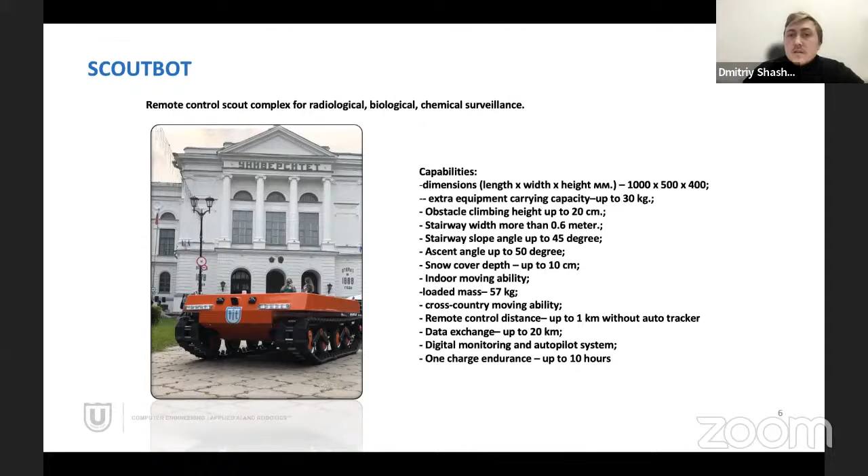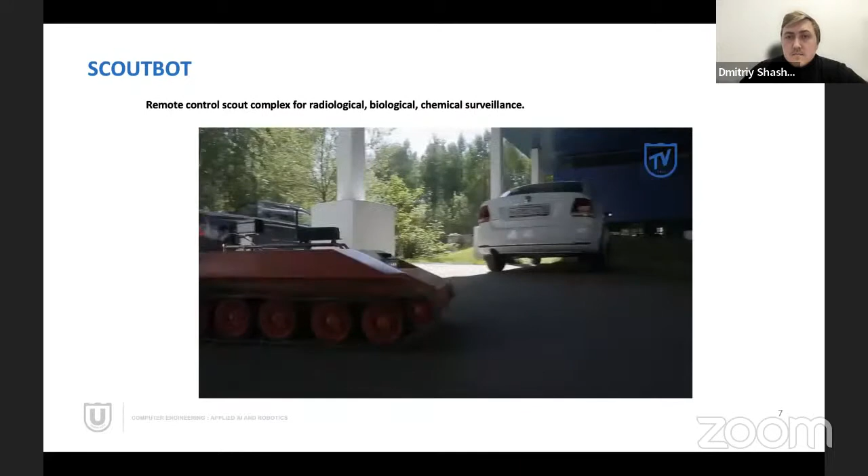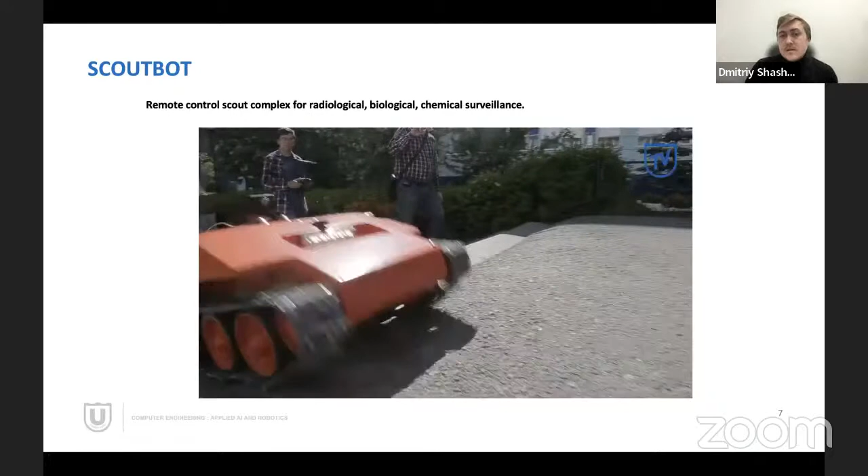Let me tell a few words about our projects. One of them is ScoutBot. This is a remote control scout complex for radiological, biological, and chemical surveillance. And this is a video of how it works in real life. This type of robot was made by the staff of our laboratory, and it can be controlled remotely and also autonomously.

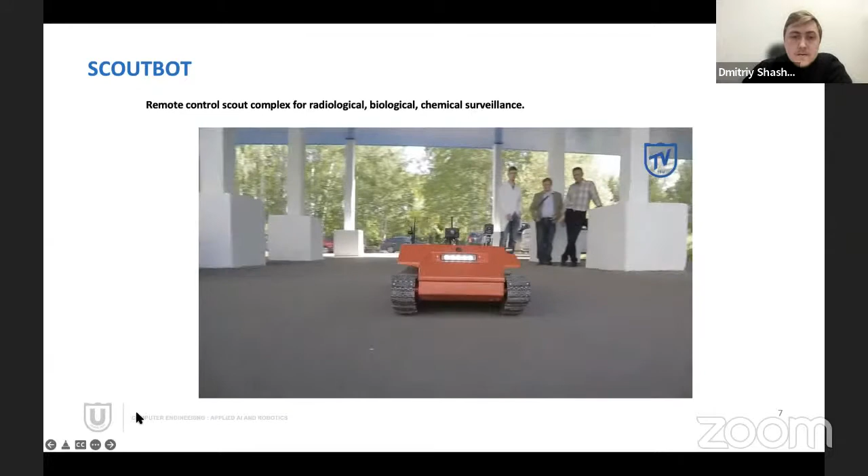If you are interested in such types of robotics, you're welcome to join us. Another big field of our research is UAV and different subtopics of the UAV field. We focus on autonomous control systems, and we also work on SLAM navigation. Maybe some of you are familiar with such algorithms. It is one of the modern approaches in the navigation of any robot, simultaneous localization and mapping.

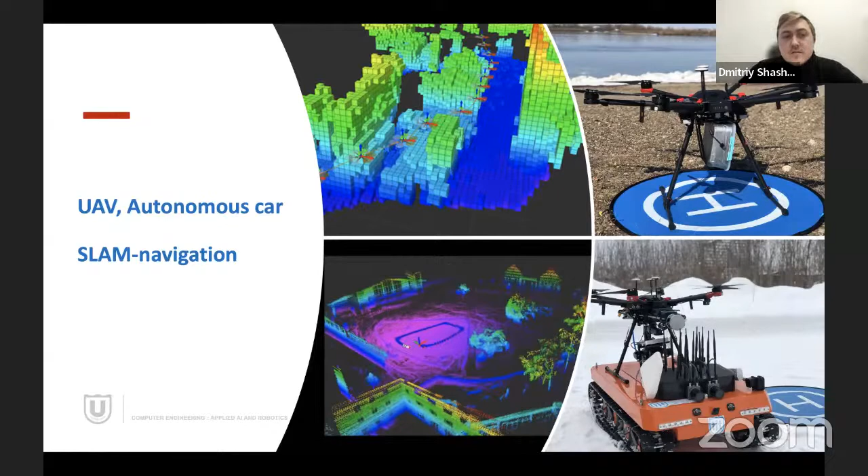This is also one of our projects, named Drone Hunter. It was a project about developing an autonomous control system for UAV, a highly intelligent control system. The idea was to track and recognize other drones on board without using any ground stations, cloud systems, servers and so on.

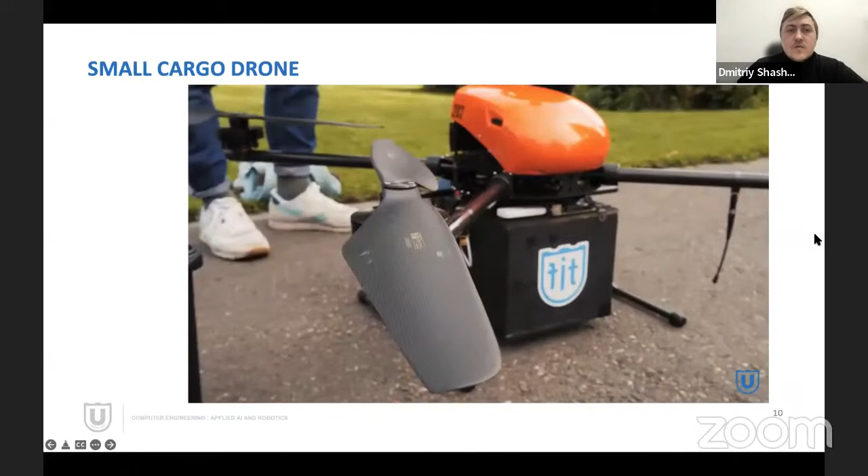One of our projects is with our industrial partner, one of the biggest in the field of UAV in Russia, the company named Geoscan, and we work in the field of small cargo delivery with this company.

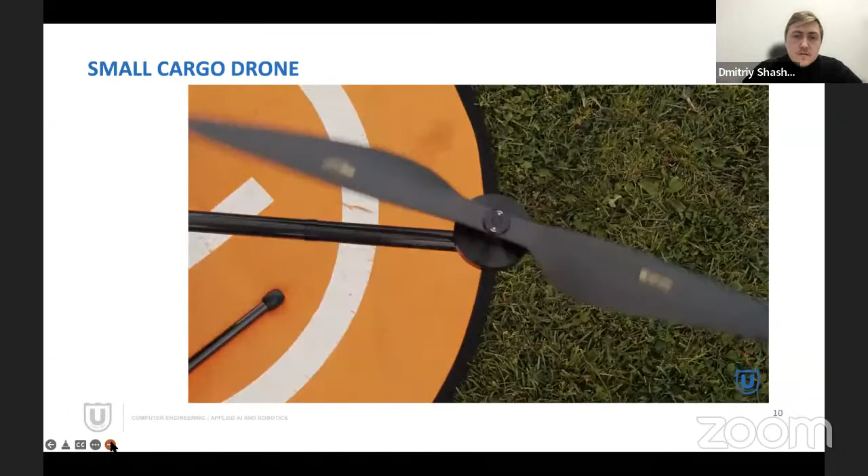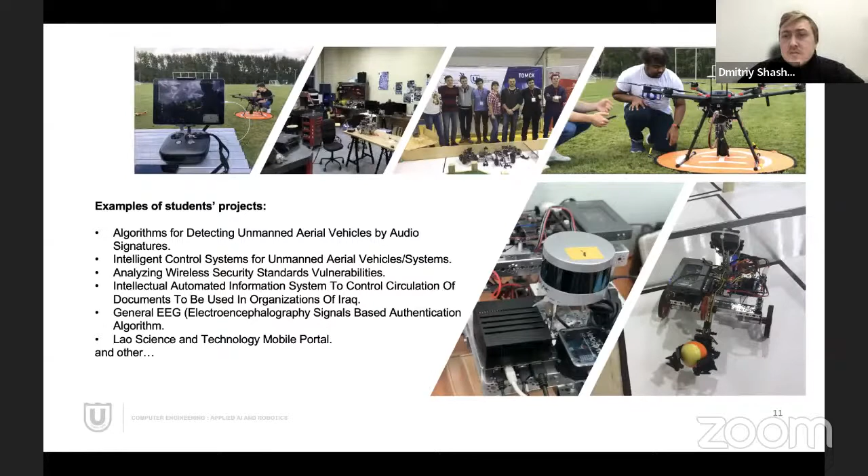Okay, let's move on. Here you can see examples of students' projects which have already been done: algorithms for detecting UAV by audio signatures, intelligent control systems, analyzing wireless security standards, intellectual automated information systems, and so on. Okay, that's it from me.

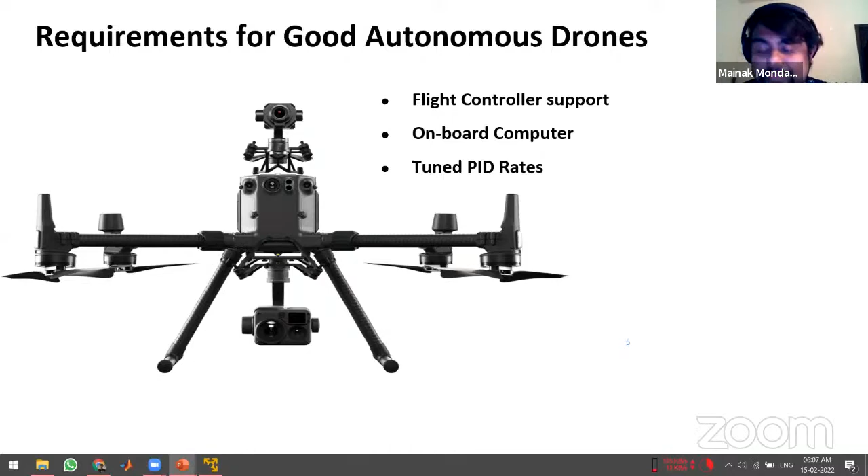So I'm not going to be going into them. There are various guides online. But again, if you want any help on them, you can of course reach out to me. Yep. So tuned PIDs are a must. Okay. Let me get into the introduction a bit more.

Let me tell you what a flight controller is first. A flight controller, or FC, is a small circuit board of varying complexity. Its function is to direct the RPM of each motor in response to the input. Just a second, we have another guy. A command from the pilot for the multirotor to move is fed into the flight controller, which determines how to manipulate the motors accordingly. And once you manipulate the motors, you can generate thrust and move accordingly. Okay.

Then, of course, the major components inside the flight controller are the onboard sensors. There's usually a gyroscope, accelerometer, barometer, etc., so that it can accurately recognize the state of the drone and make adjustments to stabilize the drone or move it according to the user input. There has to be a sensor interface connection, something like UART, I2C, PWM, serial, SPI, etc. You need to connect your flight controller to the motors and to different external sensors if required, like a GPS or maybe an external IMU.

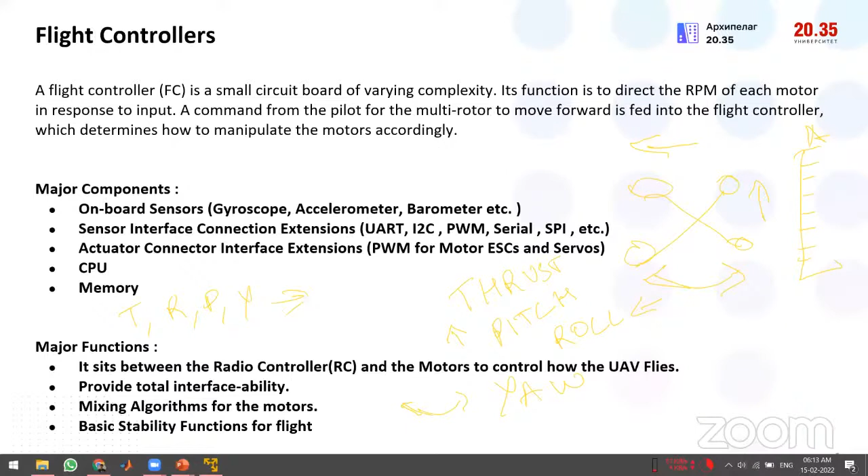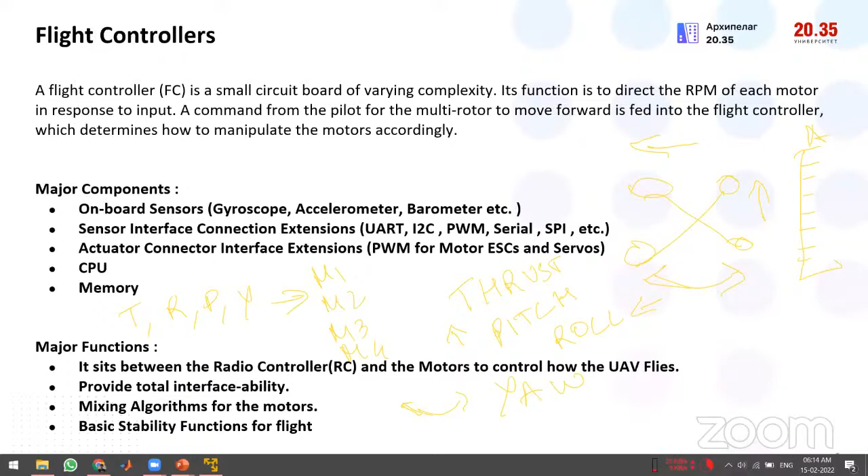And this, of course, is controlled by the flight controller. What the flight controller does is it takes in commands of thrust, roll, pitch, and yaw, and gives output for 4 motors. So for example, we have a quadcopter, so it will give you outputs for M1, M2, M3, and M4. It needs to distribute the thrust, the roll, the pitch and the amount of yaw for each motor.

Let me just clear out the screen. I hope you could see the drawing I was making. Yep. Let me just remove this. Just a second.

Okay. So there are several flight controllers supported. Most flight controllers are divided into F1, F3, F4, F7, and H7 flight controllers. These are basically the processor chips inside the microcontroller unit. The processor is the brain of the flight controller, similar to the CPU in a computer.

There are currently 10 series of STM32 microcontroller units. From faster to slower processing speed, there are H7, F7, F4, F3, F2, F1. So the slowest one is F1 and the fastest one is H7. As you can see, the processing speed varies from level to level.

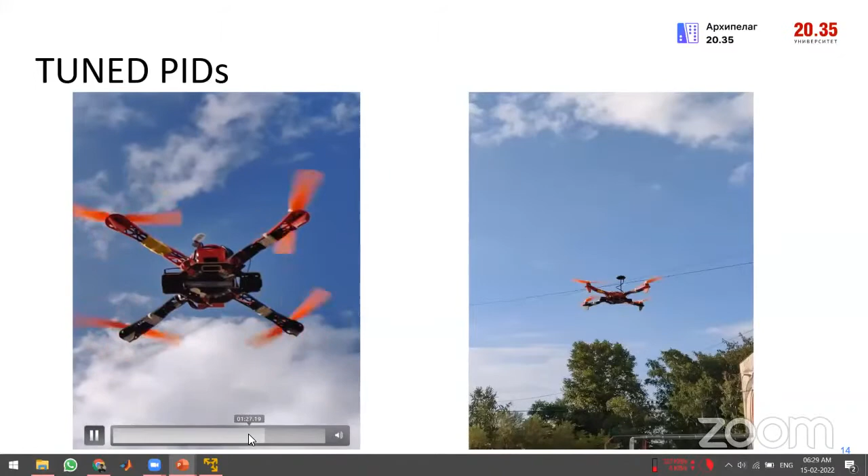Let me just move it forward. I go below it as well. And you can see the drone is as stable as it gets. Okay. And this is another example where I'm moving the drone. And at the moment I left the sticks, and you can still see the drone moving really well.

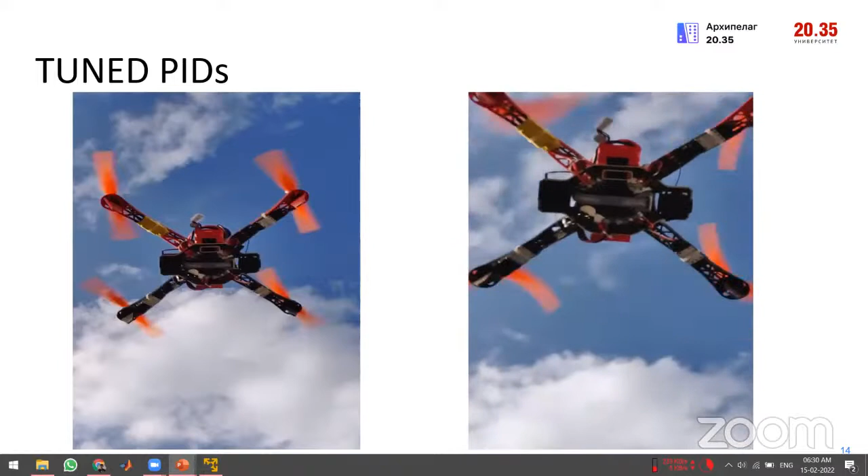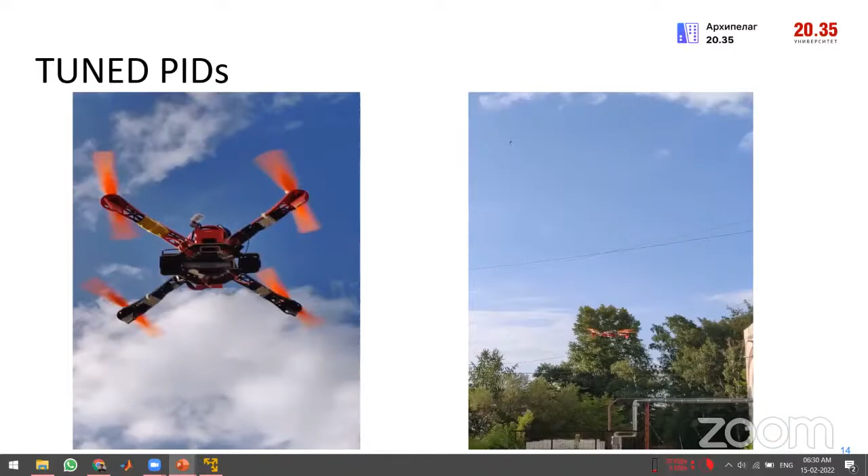So if you're going to build your own drone, I suggest reading about PIDs, and of course tuning your drone. I'm not going to go into what the PID system is. Anyway, let me tell you where smart control can be applied in drones.

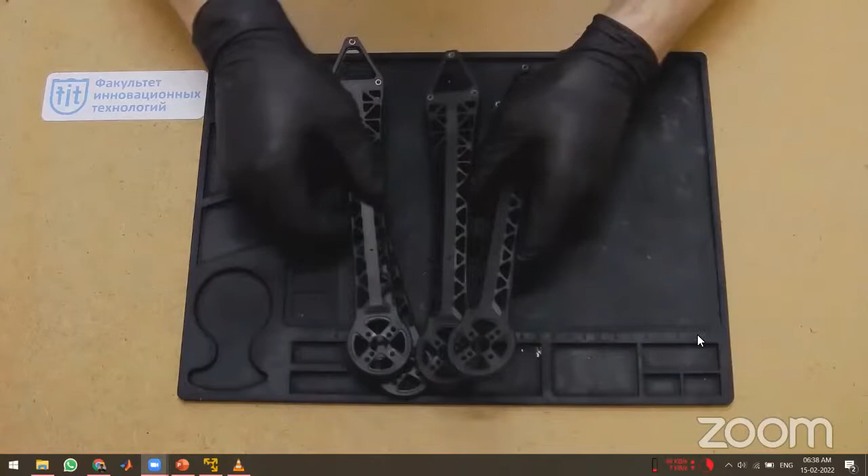Okay, this is the build part of the drone. Before we begin, I want to show you all the parts we're going to be using today for assembling it. These here are the arms of the drone where you'll be attaching the motors, and this will attach to a base frame which will finally look like a quadcopter. The circular edge is where you'll be attaching your motors using 4 screws, and the triangular edge is where the arms will attach to the base frame.

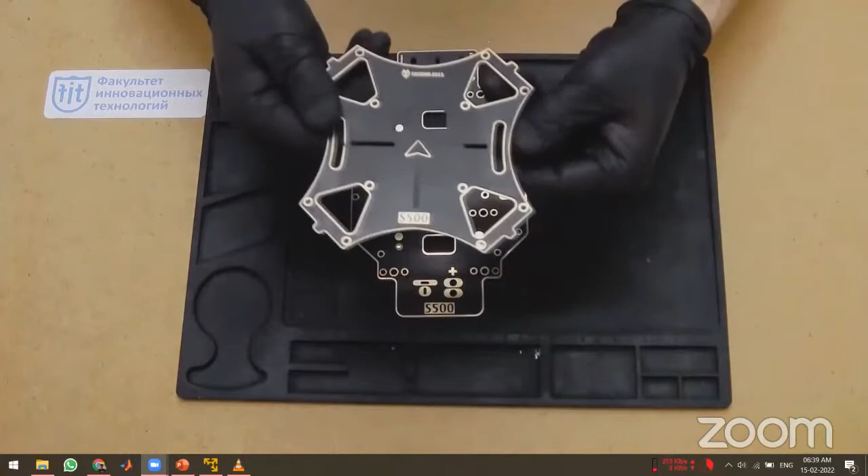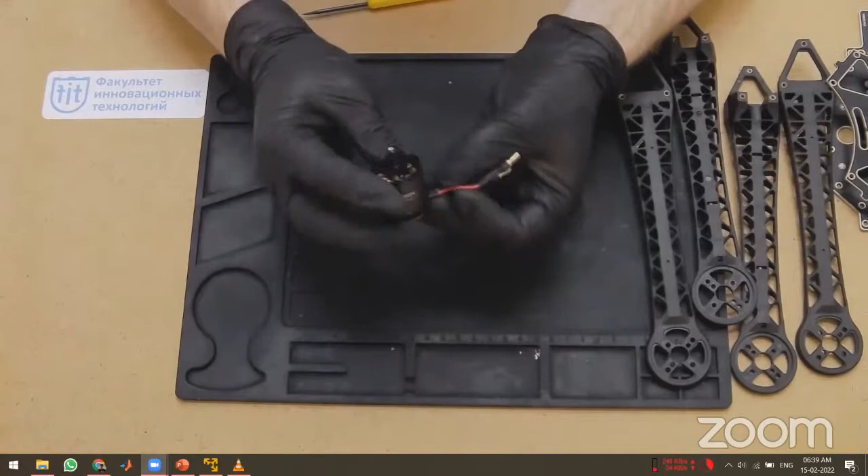This here is the base frame where there are 2 layers. One is the power distribution board with the plus and minus, as you can see there. And here are the motors. These are brushless motors. There are 3 terminals where you need to connect your ESC. This finally here is the ESC. Again, as you see, there are 3 banana connectors where you'll connect your motor. There's a plus and minus to power the ESC, and a signal and ground to send signals for the motors.

This is the bottom part of the base plate where you'll be attaching your battery using the strap provided. These are the legs. As you can see, these are carbon fiber legs, and this will be attached to the base frame. And these are 2 carbon fiber rods which will be used to hold all of the frame together. And these are the 4 propellers that we're going to be using, 2 counterclockwise and 2 clockwise.

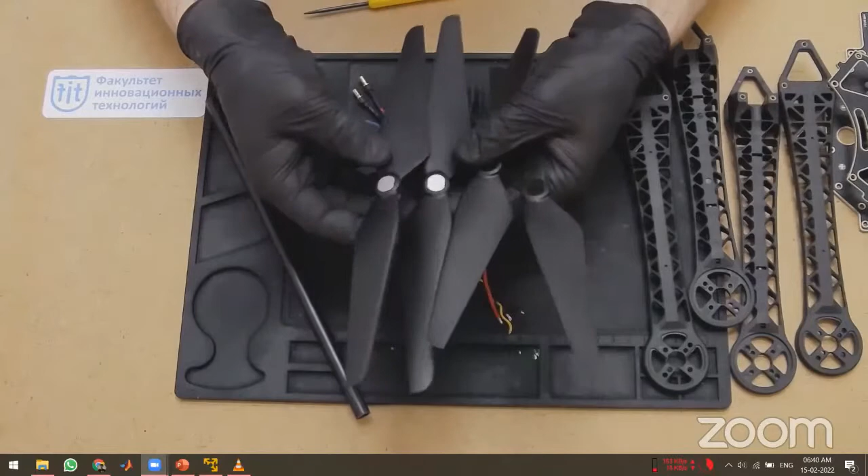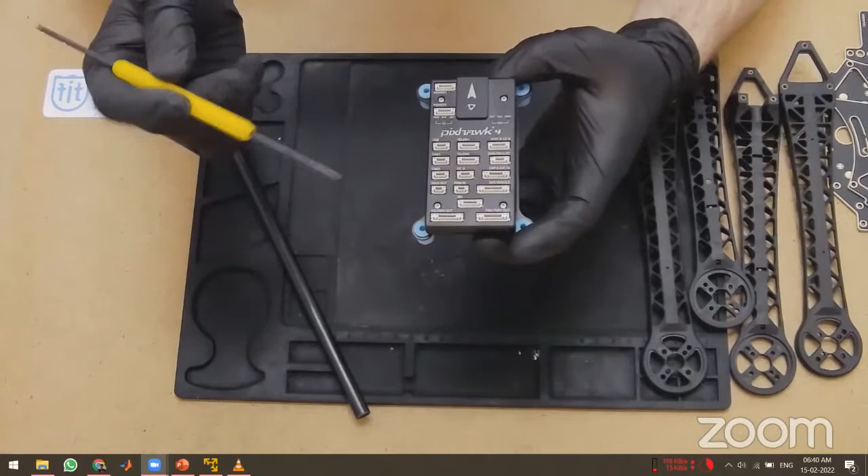This here is the Pixhawk 4 platform. It's the flight controller and the heart of this build. The flight controller, as you can see here, contains a lot of connectors where you can connect various peripherals to the flight controller. This is the ESC. Once again, this is the motor, and these are the banana connectors. This motor is a 2216 880 kV motor.

Yeah, I forgot about this. This is the RC receiver. This is how we'll be controlling the drone. This is the telemetry module. One is for the ground and one is for the drone itself. You can connect it to the computer using this module.

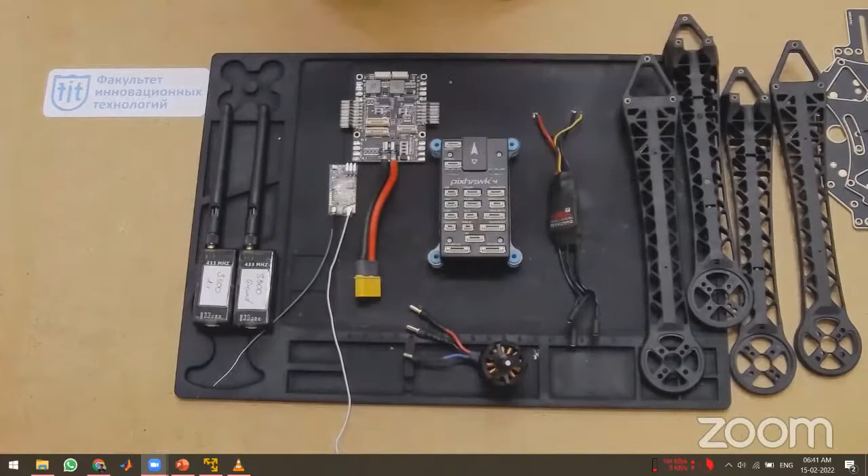This is the power distribution board of the flight controller, where you will connect all the motors and will connect the battery. This will power up the flight controller itself as well. This has the FMU outs and the IO out as well. So let's start assembling the legs and connect it to the base frame. In between, I might speed up the video.

Please don't mind. So it is suggested to connect all the parts of the drone using screws, but the screws should be using a component called Loctite, so that while there are vibrations, they don't shimmy off. As you can see, I'm using the blue liquid. That's this thing, Loctite. Quickly moving on, let's go ahead. Here, I would suggest that you use an electronic screwdriver for faster operations, but either way, it's up to your preference.

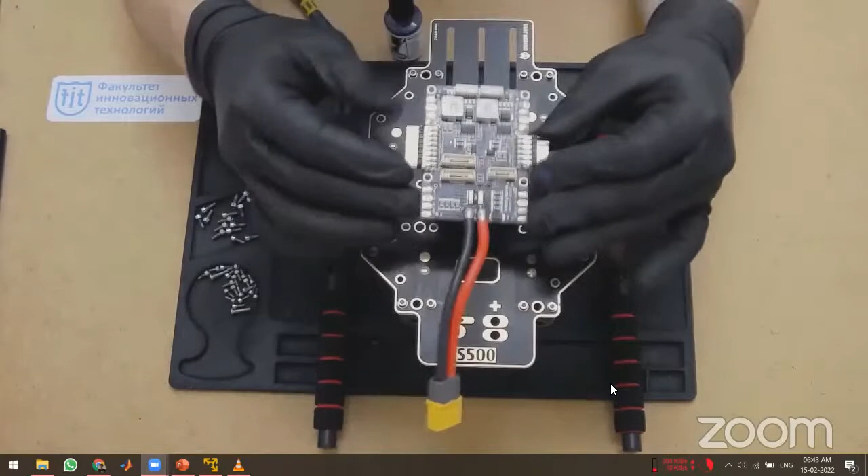As you can see here, we connected everything. Now we are going to be connecting the carbon fiber rods into the base frame using the same methods. As you can see here, I'm pointing the screwdriver towards the front, that means the drone will be pointing towards the front accordingly. You can change according to your preference.

As we can see here, I'm gonna be connecting the power distribution board, and I'm gonna be using 2 screws, but we have a problem, as you'll notice soon, that the screws don't exactly align. So it's okay to leave it like this, but it's better if you make it more secure using zip ties. You can find a more compatible power distribution board which is suited towards your frame. We didn't have one at hand, that's why we're using zip ties.

So you need to make it really snug and put it in properly and cut off the extra bits. Now we have quite a lot of the power frame assembled. You can see it's starting to take shape. And check that it's put in snugly. And remember that you have a plus and minus for the battery with an XT60 connector, as you can see here. Here you'll be connecting all the motors.

Each motor has 3 major connections, that's ground, signal and VCC. There are 4 here, but 3 should do the work, and I will be connecting 3. This is where you'll supply power to the flight controller. This is where you will put the IO PWM in from the flight controller. An IO PWM in connects the flight controller to the aux ports in this board. I'll tell you about aux ports later. Those are the signal pins, the small ones.

Let me get some things. Now you'll see I'll be soldering the ground, positive and the signal. There are 2 grounds technically, but if you connect it to the same ground, it doesn't matter. For better connections, I'm using 3 different pins. We do it for all the 4 ESCs, as you can see here.

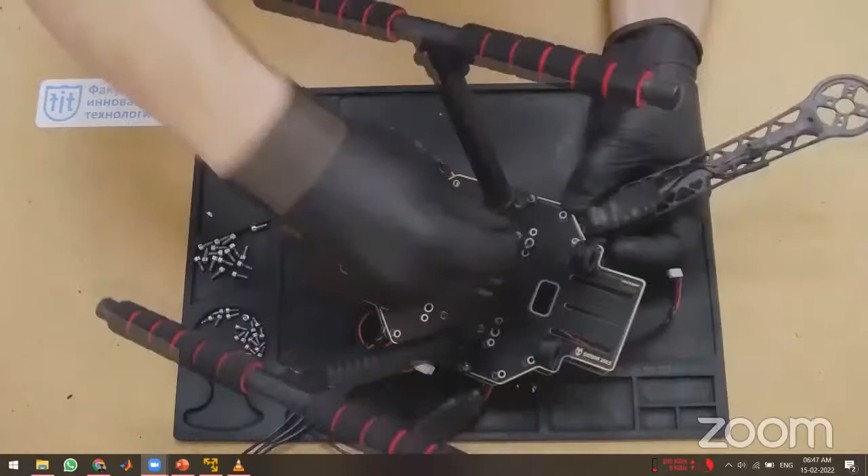Connect the plug here for the power. Your power distribution board might have a different connector, but the one provided to us by Holybro has this kind of a connector. The ideal way to assemble the frame is to pass the motor wires underneath the frame so that in the event of a crash they are protected.

And again, you have to use Loctite. You should. I mean, it's a very good idea because the drone vibrates a lot when it's in the air, and if you use Loctite, they won't shimmer off and come off basically. So see, I'm assembling it.

Moving on, now we can assemble the motors, and as you can see here, we need to align the screw holes over here and place it. Again, using Loctite so that it doesn't shimmer off. And this is where it's the most important, because the screws from the motors have fallen off in various of my builds because I was lazy and didn't put Loctite on. We do it for all of the 4 motors.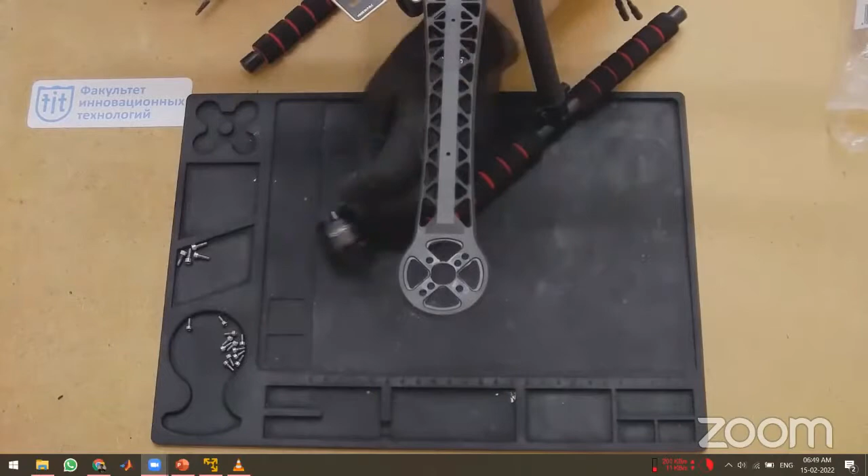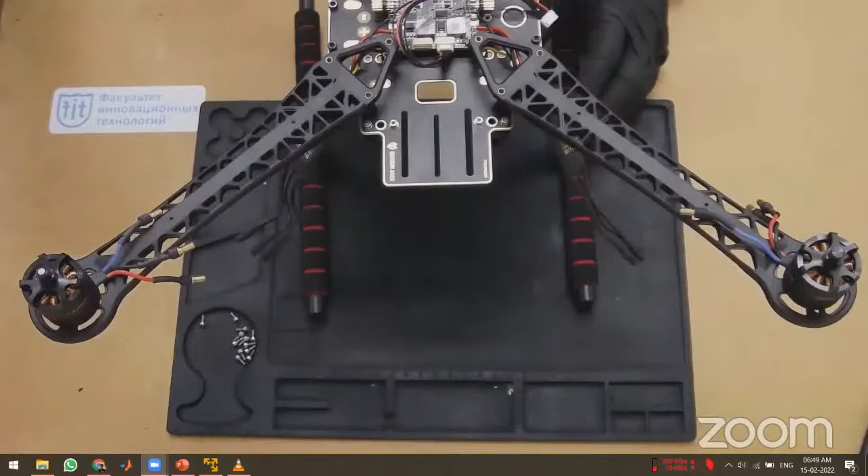Make sure to correctly put in the direction of the motors. They are clockwise and counterclockwise. This build uses the T-motor motors, and they have self-tightening props, so be careful when you are putting that in. I can explain this part later, but it's one of the beginner mistakes everyone makes.

Moving on, putting the base frame, the top part of the frame. As you can see, there is an arrow which points towards the front of the drone. Again, using Loctite, we securely tighten the screws. I hope you can see them. And I'll tighten them a bit more securely.

A good suggestion would be, if you want to make the drone and you make some mistakes, it's easier for the first build that you don't use Loctite. Go ahead, fly it out, see if you have any problems, and then reassemble the drone using Loctite, the blue liquid. You can see here, it quite looks like a drone now.

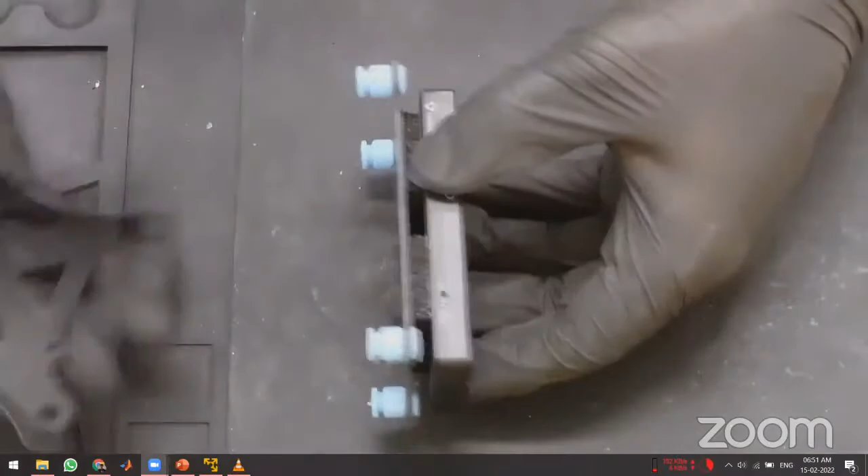Now let's look at the flight controller. I've already attached the flight controller using 3M tape, or vibration dampeners, to a vibration dampening plate. This part is not compulsory, we just had one in hand, it was going to waste, and that's why we used it. You can see that there are 2 plates separated by 4 rubber spacers, which will dampen the vibration.

You put it in properly, and now while it's assembled, you can see that while it's flying, it can dampen the vibration, since it will be suspended. Now we'll be placing this on the part of the frame, so we'll clean it properly because we will be attaching it using double-sided tape. You see how it lines up correctly, and it should face the front according to the frame.

This part is not as important if you are into custom builds, but either way, we're going to be using 3M tape provided by Holybro. You can buy them separately if you want, but this tape is really good to attach on this thing. So we clean it up a bit more.

The ideal place for the flight controller is near the center of gravity of the drone. But if you can't place it there, you can place it anywhere you like, but in the correct orientation. It should manage correctly if it has a good processor. After you stick it, pick up the drone using the flight controller to check how well it's placed.

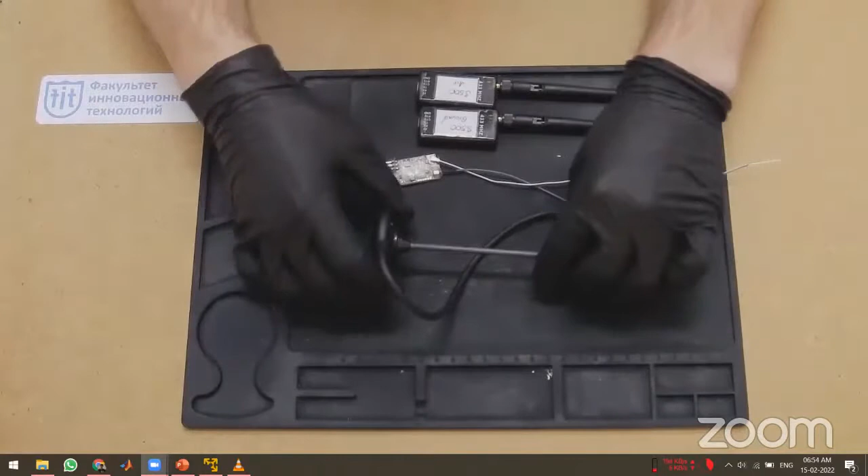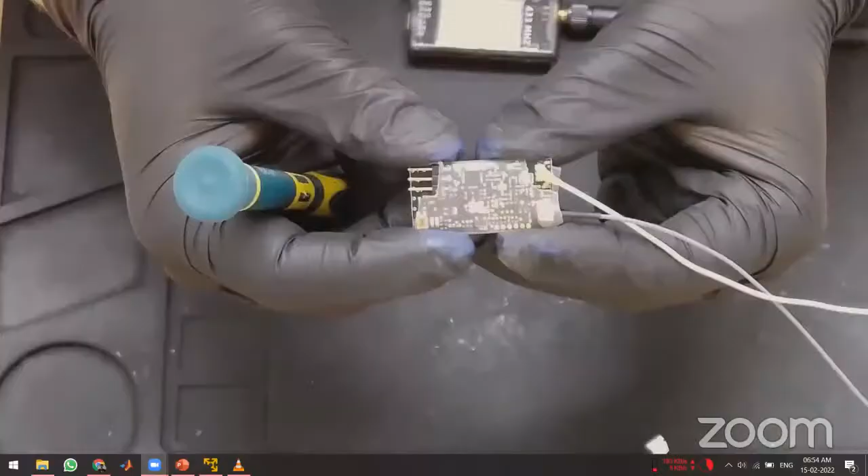Now, if you require, you can use a GPS module, and of course it has a compass in it, so you have to make sure that it's pointed in the same orientation as your flight controller. This has about a 7 centimeter long stick to make sure that it doesn't have any interference from the motors.

And as you saw here, this is the RC module. Pretty simple. This is the telemetry module. Once again, it's for 433 megahertz. It has a micro USB connector and a normal pin for the big socket. So once again, we'll be removing 2 screws here and aligning it correctly. As you can see, the arrow should be aligned, and we'll be putting the 2 screws back so that it'll be snug.

Our build had a problem because it used to shake a bit, but we put some double-sided tape to fix that. And then we connect the GPS pin to the GPS input, a big socket. And this is the telemetry plug and the telemetry module. We connect it to the telemetry port of the Pixhawk. You can have different connectors according to your board. And of course, we need to make a connection from the RC module to the RC in of the flight controller.

Once everything is connected, make sure everything works, and place it on the frame the best way you can. The ideal place for the RC module is somewhere near the flight controller, making sure that you can have the 2 antennas at a 45-degree angle or a 90-degree angle. As you can see here, we're going for a 90-degree angle. We're gonna put it on 2 different arms and secure it using zip ties or electrical tape.

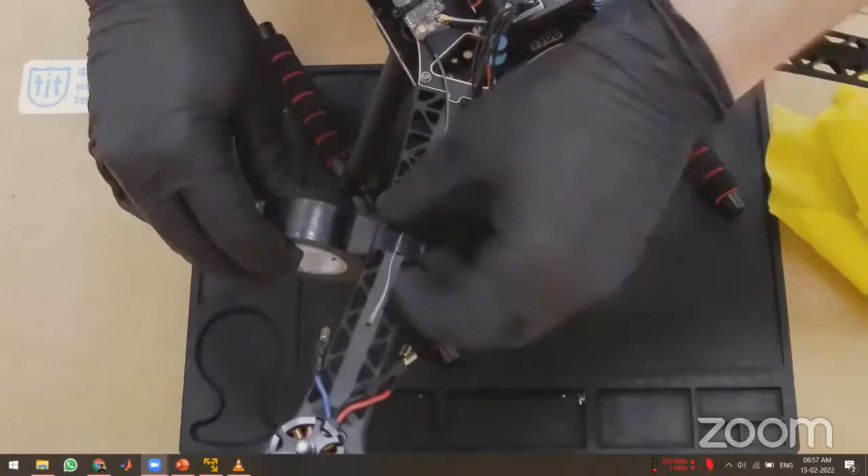As you can see, I'm going to be connecting it using electrical tape. Ideally, you'd like to save as much weight as you can, even grams count, but this is a fairly big drone and it doesn't matter that much over here. I mean, a few extra grams wouldn't hurt, but you'd prefer not to.

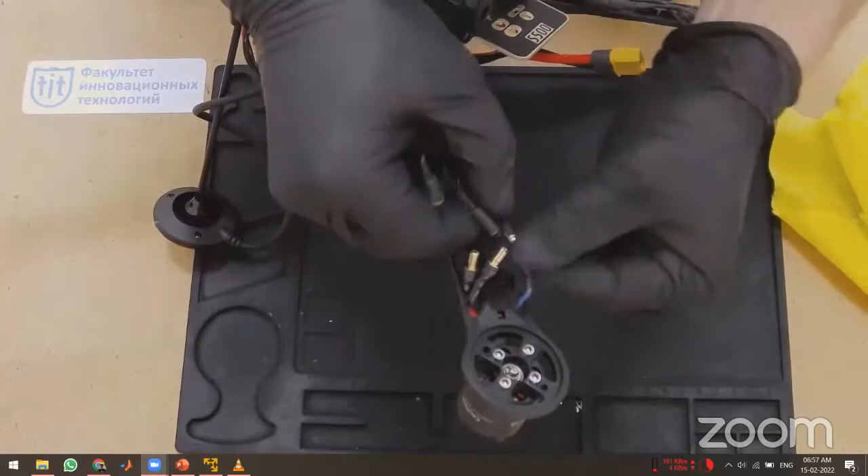Now you'll connect the 3 banana connectors to the banana connectors of the ESC. Here you shouldn't have any problems because you have banana connectors, and even if you make a mistake, it doesn't matter. You can connect any pins to any pins. Later, when we're turning it on, we'll check the direction of the motors and correct it as required.

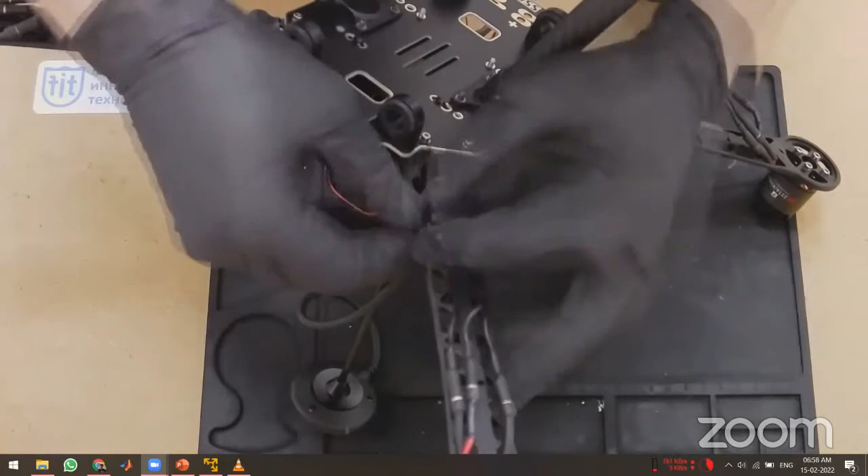To change the direction of the motors, you don't need to change anything. Take any 2 pins of the banana connector and just switch them in the ESCs. It'll automatically change the direction of the spin of the motors actually.

Now that it's fairly assembled, almost done, we'll test it using a 1500 mAh 4S battery. Let's go. I'll connect it to the XT60 connector of the power controller board, and as you can see, all the lights start up. And now we know that everything is working.

Now we need to get the carbon fiber rods and place them so that they can hold the battery holder. As you can see, we'll be doing it right now. This is the battery holder, as I said earlier. You place it like that and put it in.

Now that it's assembled, let's start testing the direction of the motors. We put in the battery. The quadcopter frame should have 2 clockwise and 2 anti-clockwise. It's not just ideal, it's always the case that there are 2 clockwise and 2 anti-clockwise. They should be opposite to each other.

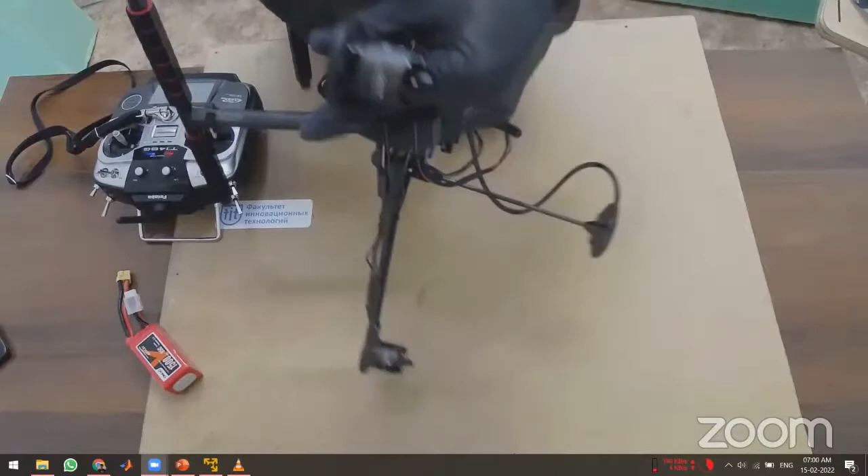Just take 2 banana connectors out and interchange them. So you can see here I'm doing that. Once again, we'll put the motors into motor testing and then see which direction it's spinning. Now it's spinning correctly.

Now we connect the self-tightening propellers. Usually all the motor propeller pairs will have some form of indication, like here we have silver heads and black heads. The black heads will go to the black top part of the motor, and the silver heads will go on the silver part. We'll connect them and make them pretty much snug.

It's necessary to keep in mind that the screw of the motor, where you'll be attaching the propeller, is threaded opposite to the actual spin of the motor, so they self-tighten when it flies.

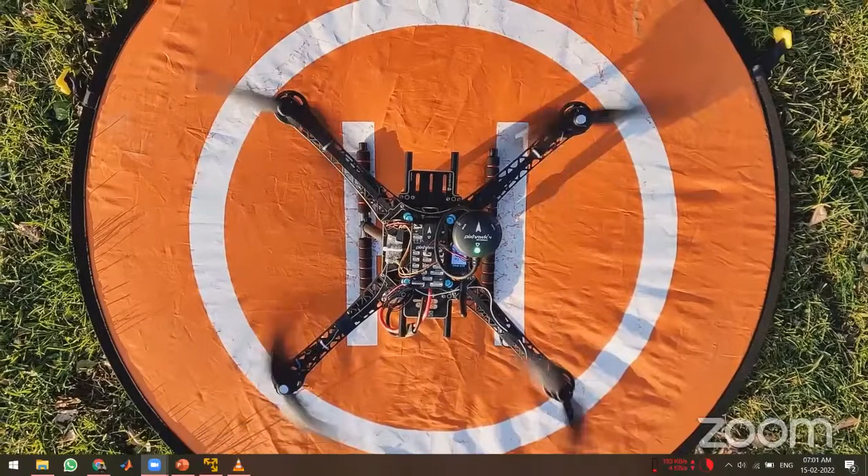Now, as you can see here, we are gonna fly the drone. I have a friend with me, and now you can see it'll take off and it flies beautifully. These controllers have a really good processor, and they can usually fly really well even without tuning. But in the video after this, I will show you how to tune the quadcopter.

Now, as you can see, it flies fairly well. You should check if everything is working. If you're happy with the tune, you can just fly with it. But usually a fine-tuned quadcopter flies much better and makes you feel happier. And there you have it. Now you have a quadcopter that flies.

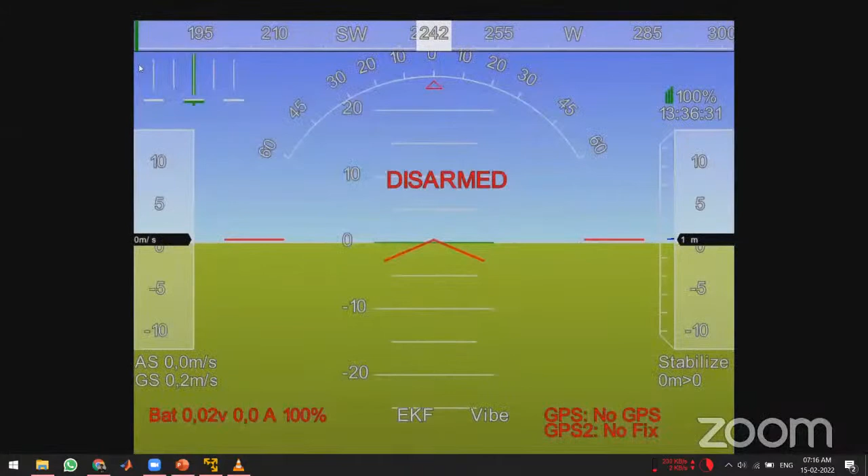This is the orientation screen where you can see all the information. To check properly if it's aligned in the frame, there are two red lines which show this is aligned to the ground, and if you move the flight controller, the whole ground frame moves.

This here shows that there is no GPS because we are inside the room, and this controller supports 2 GPSs, so that's why GPS 1 and GPS 2. We are using the GPS 2 module, that's why we've disabled the first GPS module.

Now that I've shown you how to install the firmware on the Pixhawk flight controller, I'll teach you how to calibrate everything and then tune it, or you can fly without tuning, but anyway. But you should remember that you should always calibrate it before flying. Here is a battery that we are going to be using. It's a 4S 5000 mAh battery, 5200 I think.

So as I said earlier, you have to use the provided strap and attach it accordingly, as you can see in the video. This is my friend doing it. Now it's important to remember that whenever you're calibrating or tuning the drone on the ground while it's connected to the computer, you should always remove your propellers before doing any kind of tests, because if anything goes wrong, you will not like it.

Now we'll connect the XT60 connector. As the controller boots up, we'll now connect to the drone using the telemetry module. We'll connect the antenna to the ground version of the telemetry module and use the USB cable and connect to the same software, Mission Planner. With the telemetry module, you can't flash the flight controller, but you can do everything else.

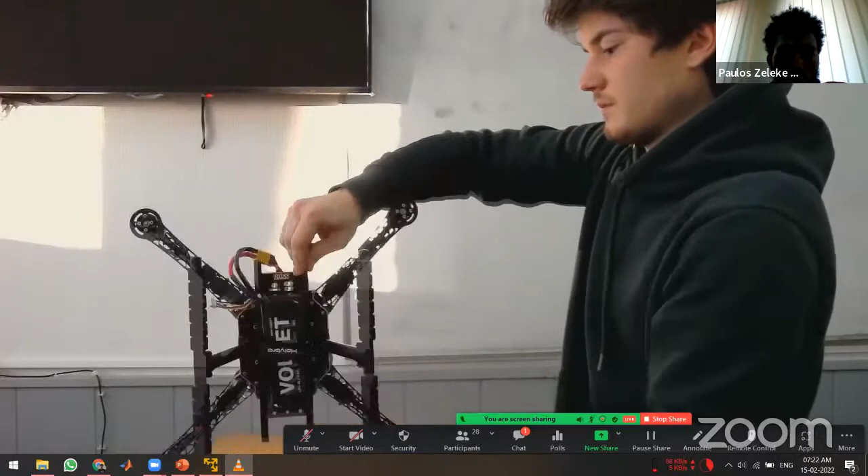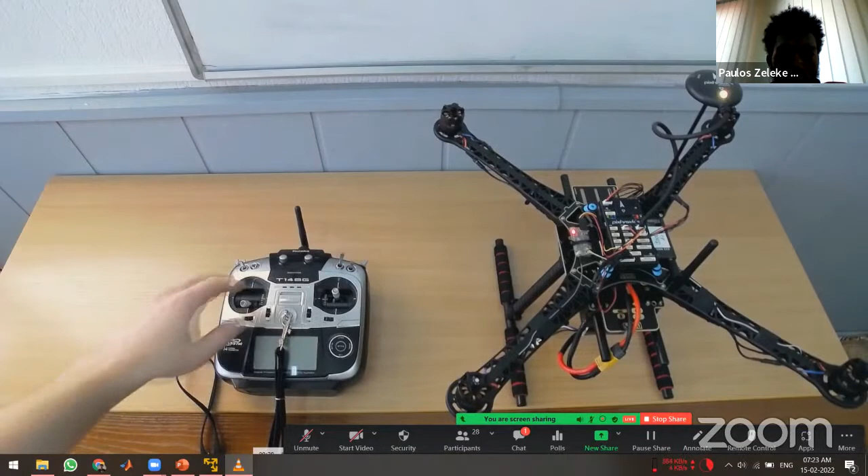It's important to remember that you keep the drone back, and to save the new calibration, you have to disconnect it and restart it just like we did in the accel calibration. Okay, after this we will calibrate the radio. There are 8 channels, and by using 8 channels we can control the drone. We are using a Futaba radio, and I'll show you how to go on with it.

Here you can see the channel monitor. The third channel is the throttle, and you can see the throttle increases.

Then, yeah, sorry, just a second.

After you calibrate, you'll see lines forming to mark the upper and the lower limits of the throttle, and you do it in all these switches and all the sticks that are available here. Do remember to click the calibrate button in the radio section. Do it for the switches. You can see this is channel 6.

Keep turning all the dials so that it goes ahead and does it, and after everything is done and all the channels are correctly marked, you can click done. It will save the new limits inside the flight controller.

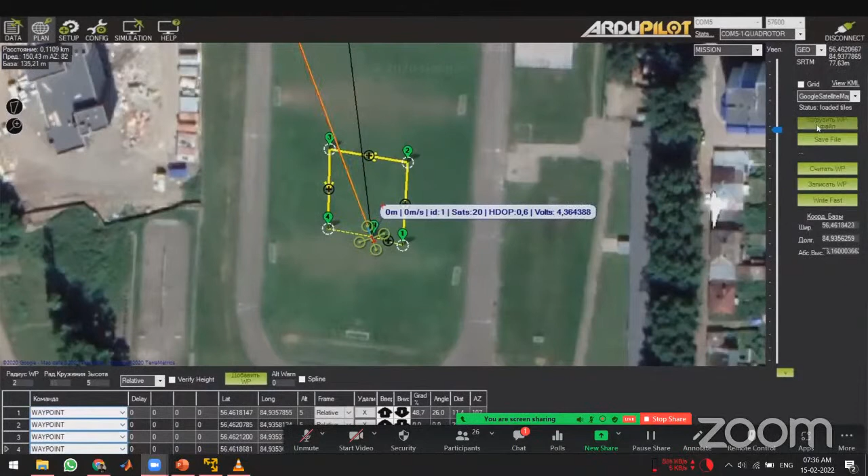As you can see here, we put 4 waypoints in the planning section of the Mission Planner. You can click anywhere in the map, it will add waypoints, as you can see. You can zoom in, zoom out, check wherever you want to put waypoints. Hopefully not very far. You can write those waypoints to the flight controller by clicking the write waypoints button or save waypoints button, depending on your Mission Planner version.

Once it's saved, oh, it was not saved yet, just a second. You click again, you make 5 waypoints, I guess, and then push the waypoints to the flight controller. I hope it got saved this time. And once you do that, once it shows up in your main menu, you can just click ARM and put it into auto mode or guided mode.

Please remember that the first task should usually be take off, and the last task should be land or return to launch or something, because if not, there will be a check inside the flight controller which will stop flying. As you can see now, the drone started flying according to the waypoints. It will go according to there.

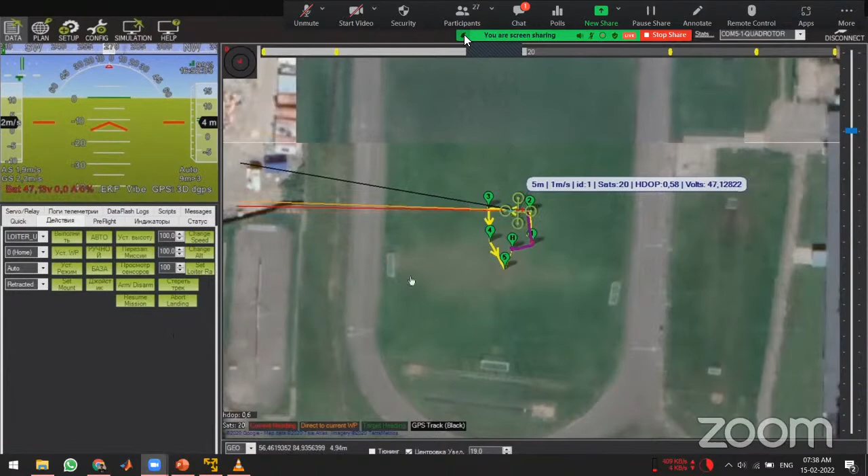We're recording from a Mavic. You can see it will make a square and then go to the 5th point, and well, fairly a square, 5th point, and then come back to the launch point.

After this, after it finishes the waypoint, if you haven't given any actions, it will just hover where the last waypoint was. You have to then give it an action, return to land, or whatever actions. He here was controlling the drone, that's why it went there, and now it'll go back.

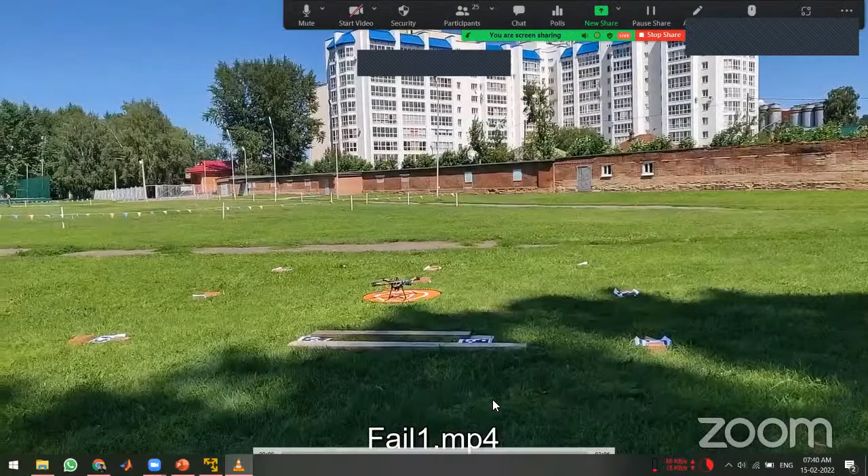Like you can see, the drone is flying pretty well for the timing, but at the end, I'll just show you that not all of our tests are always successful. Of course, we make mistakes, and that's why it's really important that you be careful when you're flying drones, because, well, you get hit by a propeller and it might not be very good.

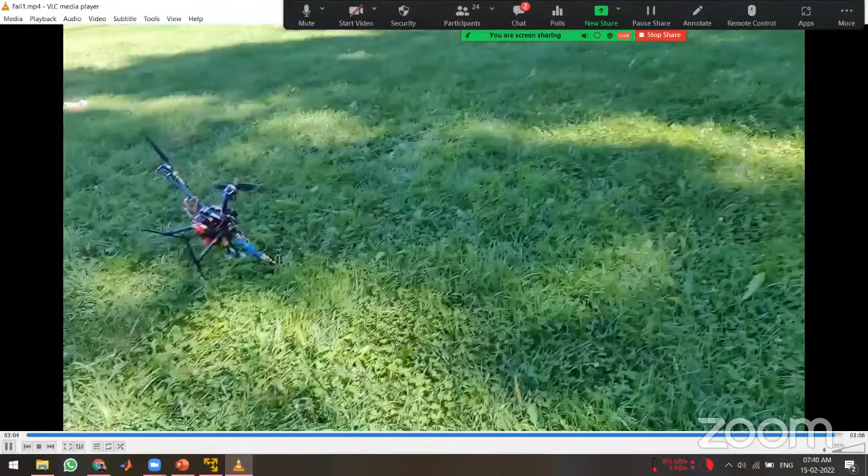So we're trying to land the drone here, but we forgot that our battery was too low, and that's why, yep, there you go. You can see that not all tests are successful. We did manage to make a successful test that day. We recharged the battery, went back, tests were successful after this. Look. Yep, flying stably as we wanted to.

So it is very important to remember when you are flying a drone to be careful and take all the necessary precautions. Up until now, if you have any questions, please let me know. Maybe it didn't understand. 3 minutes already, so yeah. Yep, as you can see, it lands fairly nicely. That makes it a successful test. So let me know if you have any questions up until now, and if not, we can move on to the short programming part.

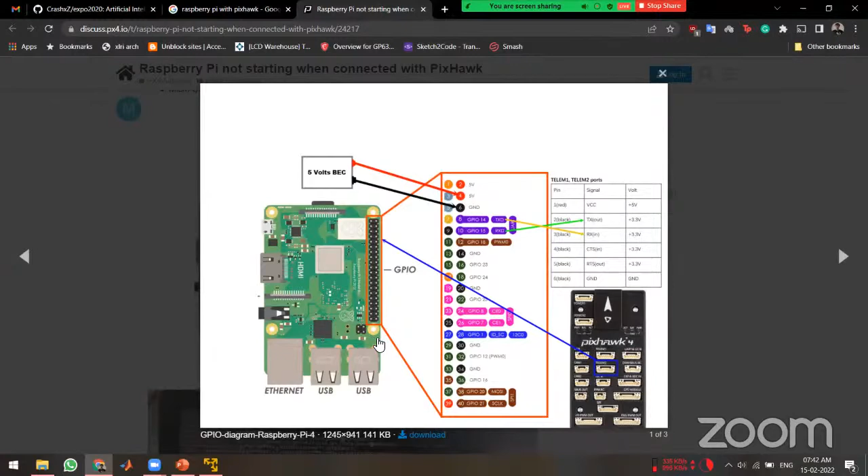Okay, before I continue, I want to talk to you about the Raspberry Pi connection to the PixHawk, a simple connection. So if you want to connect the Raspberry Pi with the PixHawk flight controller, you only basically need two pins, that is TX-RX. Let me just draw it out to you. Just a second, let me just make this like a whiteboard. I hope you can see my screen. Yep, here.

So you have the PixHawk, and you have to connect it to the Raspberry Pi, or Jetson or anything. Just a second, let my screen load up properly. So in the Raspberry Pi, you have something called GPIO, or general purpose input output pins. And depending on your program, you need to connect these pins to the telemetry 1 or telemetry 2 in the PixHawk.

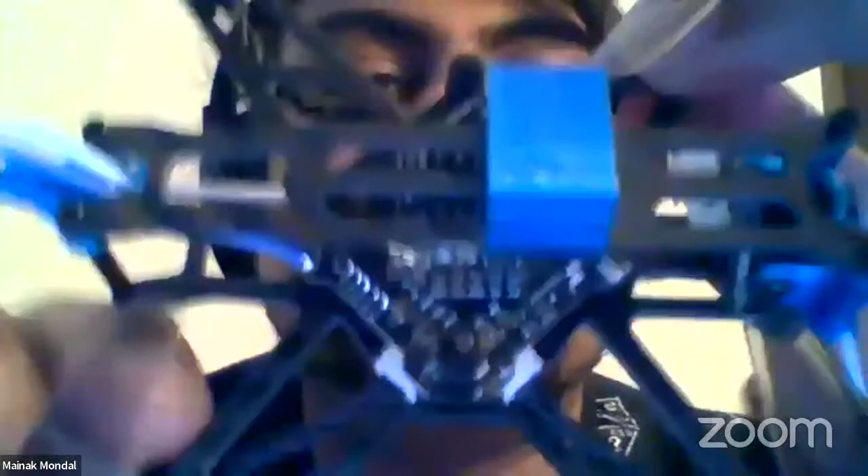Over here, I have a small drone. If you have any questions about this, I can show to you. If you can see over here, this is the camera. Okay, there's the flight controller. This is a small F4 flight controller inside over here. Okay, and then there are, of course, motors and propellers. This is a small drone, of course.

That's why this is the video transmitter over here. This is the video transmitter here, and this is where you connect the battery to it. And then, of course, this doesn't have an onboard computer, but it has a small chipboard that is right around here, which lets me connect via Wi-Fi and control it autonomously if required.

This is a controller. This is one of the cheap controllers that you can buy if you want to test drones for yourself, build drones and test drones. This is one of the first controllers that you should buy because, well, it's cheap and you can source it from anywhere. It's the BetaFPV controller.

Anyway, moving on. If you have any questions, once more, let me remind you, the drone has 3 axes and I can show it to you better right now. So let's say the drone is facing forward. This is forward. This is the pitch axis when the drone moves forward, like this. This is the roll, pitch, and then there is yaw. Okay, yeah. So use that when you're programming drones, or when you're building drones properly. Yeah, just for a demonstration. Anyway, I'll share my screen again and go ahead.

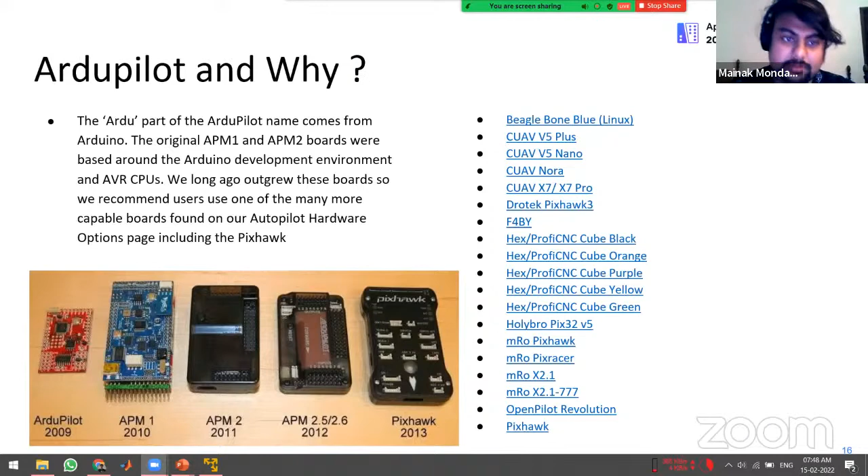Okay, so I know that not all of you have drones already built, and of course you need to test drones. So that's why you need to go ahead and run a simulator. You can have multiple versions of a simulator or multiple simulators if you want, but we are going to be using SITL in ArduPilot. You can use PX4, you can use Betaflight Simulator, you can use the DJI Simulator, whatever you want. But we are going to be working on the ArduPilot Simulator, and the task demands you to use the ArduPilot Simulator.

The QGroundControl ground station can connect to the other simulators, but I don't know how deep you have worked with drones or not. So that's why I'm not going to be going into that. For software in the loop, all the instructions that are given are for the ArduPilot Simulator. Yeah. So SITL, or software in the loop, allows you to run ArduPilot on your PC directly without any special hardware. It takes advantage of the fact that ArduPilot is a portable autopilot software that can run on a very wide variety of platforms. Your PC is just a platform that you can run on. Okay.

When running in SITL, the sensor data comes from the flight dynamics model in the flight simulator. ArduPilot has a wide range of vehicles or simulators built in, and it can interface with several other simulators as well. Of course, software in the loop can be used with MATLAB, it can be used with Python. I'm going to be showing you with Python, but you can use various other things.

You can use SITL by using the following command after you install it. That is sim_vehicle.py -v ArduCopter --console --map, like this thing. And of course, if you want to know about it in detail, you can read it directly on the ArduPilot website. Here's the link to it over here. You can go ahead. Okay, let me just show you this thing while you're working at it.

Look here. If I use an autonomous landing, I just made this package, and the code is available on my GitHub, on the link I shared. If you can do it, it'll take off and land on the red square. You'll see if it'll take off now. Sees the red square in its camera, goes to the red square, and eventually will land.

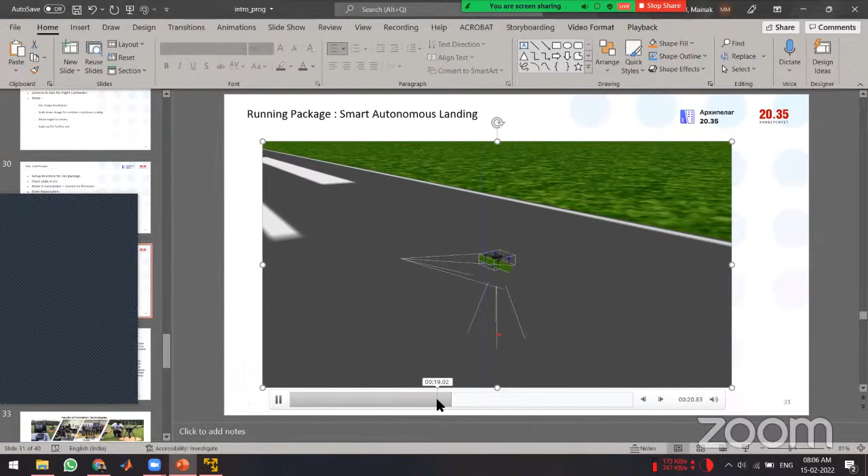Just show it here. It aligns itself on the square so that it lands exactly in the middle. Well, somewhere in the middle where it sees the square or the landing pad, and it'll land. Our lab does have a research paper on this. If you want to read more, we can link that to you after it's published.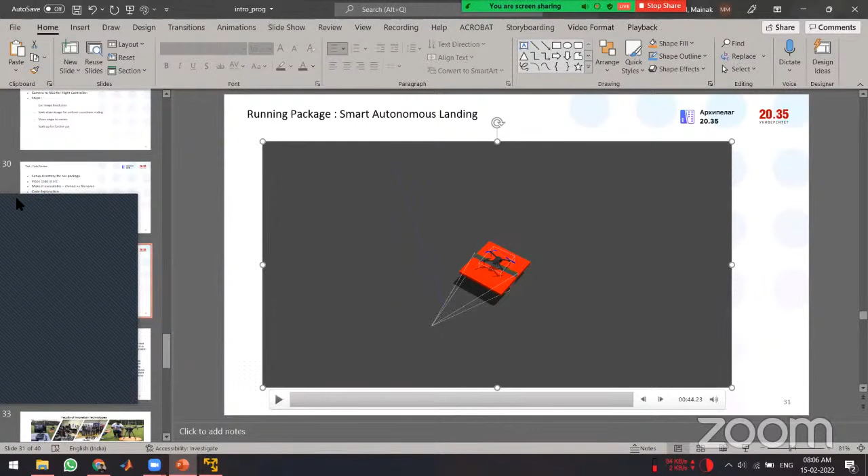Anyway, moving on. We have exhausted most of the time for our class, and that's why I'm going to be showing you the easier method of controlling the drone using a ground station. Let me give you an example. I'll just close everything so it's easier for you, and I'm going to be launching it again, so you're going to be seeing what I'm seeing after you install the program properly, as given in the GitHub link.